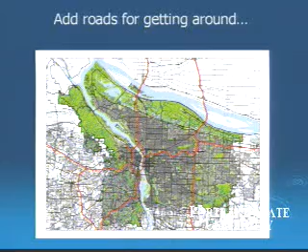Stormwater is when rain hits a surface. The magical transformation happens. When rain hits a surface, it suddenly becomes stormwater. And we have a lot of stormwater. Within the 145 square miles within the city limits, it equals about 40 square miles of buildings, pavements, and streets. So about 40 square miles of impervious surfaces that rain does not penetrate. Therefore, it runs somewhere else, making it stormwater. 37 inches of rainfall produce 80 to 100 billion gallons of stormwater per year in the City of Portland.

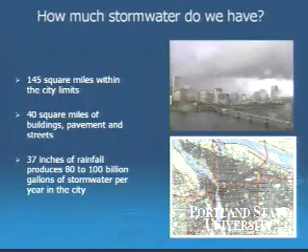For the past 8 months, there has been a transformation in my thinking. What I used to think was rainwater is just stormwater about to be birthed. We have to deal with up to 100 billion gallons of stormwater a year. It's an amazing task for us. Now, where does the stormwater flow? Before there was any building, any construction, any improvements, it ran naturally to the watersheds. There are 5 watersheds in the City of Portland. They all run to the Willamette River, except for the headwaters of Fanno Creek right here. They run to the Tualatin River. They're part of the Tualatin watershed.

But most people living in the City of Portland don't think of living in a watershed. And part of how we make progress on reclaiming and improving the Willamette River is, of course, reclaiming and improving the watersheds that feed the Willamette. So that's our task. And just to give you a sense of the shape that they're in, every single one of our watersheds in the City of Portland gets a failing grade from state government.

In the Willamette watershed, which you can see up there, which is a lot of the center of the city, we have problems with metals and toxics. It's the oldest part of the city. It's where the industry was founded back at the beginning of this city. In the Columbia Slough, which is along the northern part of the city closest to the Columbia, we have erosion issues and water quality. If you've been to the Columbia Slough, it was just used by industry as a dumping ground for almost a century.

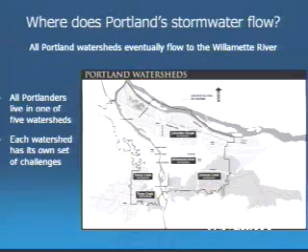Fanno Creek, which is on the southwest part of Portland, the biggest problem there is temperature and not enough water in the watershed. In Johnson Creek, on the other hand, we have a problem with too much water, and we're in the process of buying up the natural floodplain that people have built into. We've purchased about 130 acres of the floodplain, and we remove houses. We still have about 130 acres left to go.

And in Tryon Creek, we have issues of erosion, temperature, and water quality as well. So there are lots of problems in the world. Why should you care about stormwater? Why do you care where it flows exactly?

Well, just from residential use of property, we get herbicides, pesticides, fertilizers, detergent cleaners, animal waste, paint and household chemicals, motor fuels, oils, lubricants, solvents, and then as you get into the commercial use of property, you get into things like industrial toxins, heat, and erosion caused by excessive flow rate.

If the stormwater doesn't go into the ground to get cooled, if it just flows directly to the river, it hits the river or the watersheds or the streams too hot. Heat kills fish as much as pollution does.

I also want to point out that when it comes to stormwater runoff from streets, motor fuels, oils, lubricants, solvents, tire rubber, and brake shoe linings are not cleaned by the city's sewer system. There isn't anything that cleans these things out of the city's sewer system.

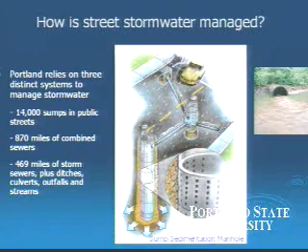But if you live in southwest Portland, even though you see a street that looks like any other street in the city, and even though you see the grate in the street, it goes directly to the river. Doesn't pass go, doesn't do anything, goes directly to the river. And when it hits the river, it can look a lot like this.

So just to give you a sense citywide of what is served by what, the magenta is the combined sewers. I think of it as pink, but somebody thinks of it as magenta. The dark red is the separated sanitary sewers.

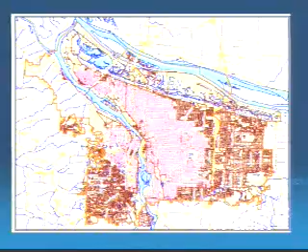So to be clear, this is the sanitary sewer system. We have separated and we have combined. The dark red is where the pipes in the ground only deal with sanitary sewer waste. The pink is where the sanitary and the stormwater are dealt with in the same pipes. That's the older part of the system in some cases. So that's sanitary. This is stormwater. We run two separate sewer systems here.

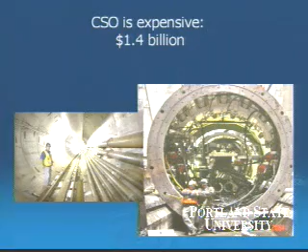So, many of you heard about the CSO project, and you might ask, we're going to spend $1.4 billion on the combined sewer overflow project. On the west side, the pipe is 16 feet wide. On the east side, we're soon going to be breaking ground on the other section of pipe that's 25 feet wide. Shouldn't that take care of this whole issue?

Well, it doesn't. Again, for a number of reasons. One, if you live in Southwest, again, it goes directly to the river. If you live on a street with a sump, the street stormwater runoff doesn't go to this pipe either.

We have some of the highest stormwater rates in the United States. We charge people separately for their sanitary charge, which is very high compared to other cities in the United States, to pay for that $1.4 billion CSO project. But we also have one of the highest stormwater rates in the country.

And the major reason for that is that in Portland, as opposed to most other cities, the sewer ratepayers pay for all the street stormwater charges. In other cities, automobile users pay for it with the gas tax. Here, the sewers pay for everything. In most other cities, it's paid for by gas tax.

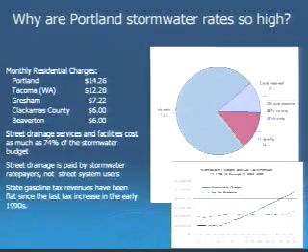Some other statistics there. So, we're trying to rethink stormwater. And we think that we can make stormwater into a positive. And you're going to see how we're trying to manifest and re-engage our community into turning stormwater into what it was before we were a built-out city, which is a positive for the environment.

But even if we didn't want to do that, there are many regulations that would make us do that. We have the Safe Drinking Water Act. We have the Clean Water Act. We have the Endangered Species Act. We have land use laws, and we have the Portland Harbor, which has been designated a Superfund site because of historical pollution. And there are many things that drive us to do this, even if we didn't want to do it.

This just gives you a few of the other regulations that you might not know about, but they'll be on the test later in the discussion, of the kinds of things that we have to react to in terms of trying to deal with both sanitary and stormwater sewage. So now we're getting into how to turn this into a positive, and we do look back on what happened before we were a built-out city.

The typical annual water budget in forested land cover, and we were forested and field land cover here: when the stormwater hits the ground, about 37% of it evaporates. Only 0.3% is surface runoff. And that's an important thing to key in on compared to the next slide. Then about 25% of it is within the first 5 feet from the surface, and then about 37% of it goes into the groundwater.

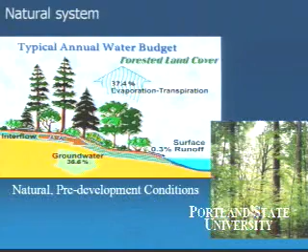But in a typical urbanized area, 25% of it does go up in evaporation. Surface runoff goes from 0.3 to 30%. Interflow, which is again 5 feet below the surface of the ground, is about 30%, and only 15% goes to groundwater. So we go from 0.3 to 30. Interflow goes up from 25 to 30. Groundwater goes from 36%, you lose about 10%, to about 15%.

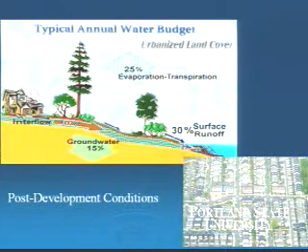Now, the problem with so much, up to 60%, being either surface runoff or interflow is, again, it hits the rivers, or it hits your streams or creeks hotter, more polluted, than if it went down into the groundwater and was both cooled and filtered. That first 20 feet of soil is what filters out most of the bad stuff, that's a very technical term, bad stuff in stormwater.

So, what's the best way to deal with stormwater, street stormwater? Manage it as close to the source as possible. Don't put it in a pipe if you can help it. And basically try, in an urban setting, to mimic the natural environment. If you have a house and you have downspouts, just let your downspouts go. Let them out into your yard, let them out into your garden.

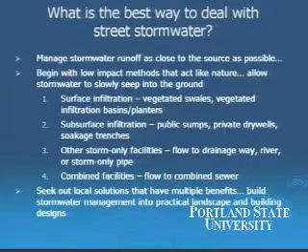Subsurface infiltration is what you saw earlier when the slide was up on the sumps. We get so much stormwater off just a block of street that we can't just let it meander around in people's yards because it would flood their basements or do other damage. So we had to do sumps, but sumps are a pale substitute for just letting it percolate down from the top. Sumps are a situation where you get so much volume, you've got to create some capacity for that sump to fill up when it gets really rainy, and then, when it stops raining, it deals with a large amount of water.

Other storm-only facilities flow to a drainage way, river, or storm-only pipe, like in southwest Portland, where the stormwater goes on the surface directly to the river. That's a third. And then the last and most expensive are combined facilities. When you mix stormwater with sanitary sewage, which is really warm, by the time it hits the Columbia River, it is far too hot. And again, it hasn't been fully filtered by the natural filtering that comes from letting it percolate down from the surface.

So we always look, when it comes to street stormwater, to get multiple benefits, even beyond these. So what we've been piloting in the city of Portland for the past 6 years has been the creation of green streets. And a green street is a street designed with landscape areas that capture, clean, and infiltrate stormwater. And infiltrate means let it percolate down to the groundwater.

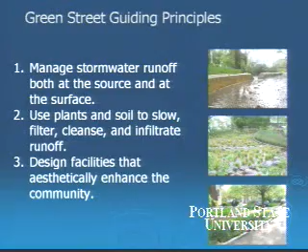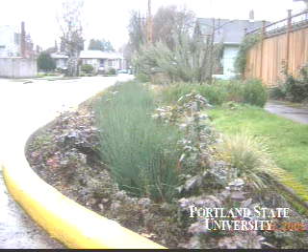People want them, as opposed to feeling like it's big government forcing yet another thing on a neighborhood. They actually want these things. This is an example of retrofit at a site along a street that has a couple of different benefits.

One, it addresses the city's goals for neighborhood livability, sustainable development. It adds green spaces, and in the city of Portland, if you live in East Portland, east of 82nd, it is an incredibly park-deficient part of town. We do really well in terms of providing parks and green spaces west of East 82nd, but east of 82nd, which we recently annexed, it is very park deficient, and with green streets we can provide at least some more green infrastructure in the area.

The other benefit of a green street is that it makes the civil engineered investments, with all due respect, last longer. The more we're growing as a community, and the less of the stormwater we put into the big pipe and into existing pipes as we grow, the longer those facilities will last. So instead of lasting 50 years, the big pipe can last 100 or 150 years if we can get that stormwater out of the system, because that big pipe will use up its capacity with growth in about 50 years, and then we'll be back to overflowing into the river. Stopping the stormwater from going into the big pipe will make it last longer.

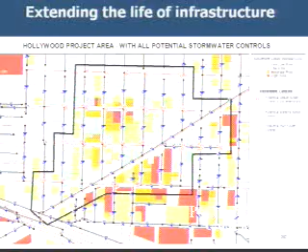And again, it meets federal requirements for pollution reduction and source management. It cools the water, and it saves money. So, in the Hollywood area, Hollywood has some deficient sewers. It was causing flooding in basements. It was causing unsafe streets. And it's an example of how the Bureau of Environmental Services, working with transportation, did a Green Street project that actually saved money.

So it was 20 blocks. The landscape flow reduction approach, which was the Green Street approach, cost about $3.5 million. We had to retrofit some streets with planters, rooftops, disconnecting pipes that go into the street or that just flow out into the street from driveways. And we did have to replace some pipes. But the conventional method, the standard method of just digging up all the pipes and replacing all the pipes, would have cost $1 million more.

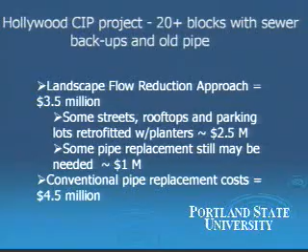Now, in the process of doing that, again, we go back to the multiple benefits. You have more water going into the groundwater. It wasn't on the slide, but between 20 and 30% of the water you see in the Willamette River and in Johnson Creek or Tryon Creek or elsewhere comes up from below, or it should. A healthy river has a significant amount of water that comes up from below. If you've got the stormwater going into the ground, it comes up from below.

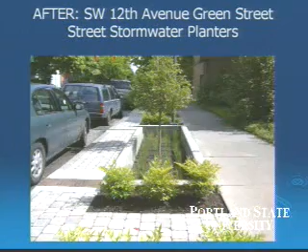This is another example of a Green Street on Southwest 12th, right nearby here. Unsightly, hard to get out of, not much going for it. And after. This was done in July 2005. It manages stormwater. It also filters pollutants. In addition to just the plants, it's designed in a way to filter pollution, and also provides more room for people to get out of their cars. So before and after.

This is just an overview of the design. The drainage comes from the south, flows into the first planter. This gets a lot of stormwater. It's designed to flow into the first planter, and on rainy days you'll see this really fill up, and once it overflows, it goes back out into the street, and by the time it gets down over here, only on the most rainy days would we have a small amount going into the piped system, the combined sewer overflow system. And all along the way, it gets filtered.

And this little pad of cement here is very important. It's just a flat surface that the street stormwater comes in off, and it filters a lot of the brake dust. It filters paint. Much like panning for gold, it filters out the heavy stuff. And then, through the Office of Transportation, we come along and sweep these on a regular basis. So even before it hits the plants, a simple pad of cement will filter out a lot of the nastiest stuff.

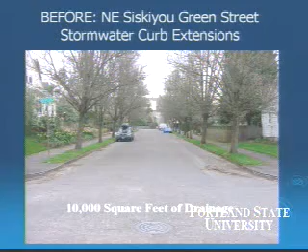This is another example. This is 10,000 square feet of drainage from the block you see in foreground to background. This is on Northeast Siskiyou Street, and this is after. Before. Of course, it helps that the before picture is in winter. But still, and after. This was very much supported, and now we get requests from neighborhoods all around town wanting to do the same thing.

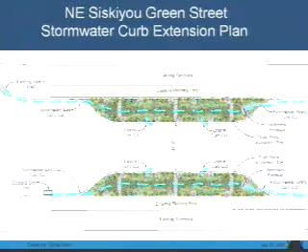This is a little different in that the water flows in directly. This is not a well-traveled street, so we didn't have to worry about filtering out some of the nastier brake linings and paint specks and things like that. It flows straight through, and any overflow goes here.

When you see this thing on a normal day, it looks incredibly oversized, and you wonder why it's so sunk down. You go on a day like any day in January, and it's pretty much filled up with water. We have calculated, and you'll see later, oh, there's an example.

We choose the plants very carefully. These are plants that are hardy. They can survive once they're started without watering in the summer, which is a problem with the Oregon climate, and they have proven qualities of filtering out some of the smaller toxins.

This is that Glencoe school site that I showed you earlier that was sort of circular. I think I have more pictures here. This was the design.

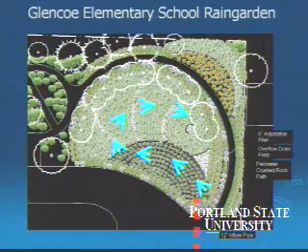Are there any landscape architects? Okay, this is going to be a growing field for you all.

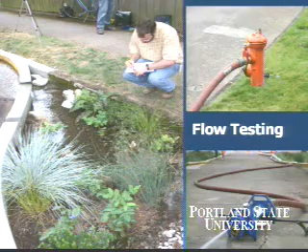The other thing you need to know is you cannot do these swales in every part of town. They're very difficult to accomplish in Southwest because Southwest has the wrong kind of soil. It's very important that we flow test because Southwest will slide off the hill if you do the wrong kind of Green Street treatment in the wrong kind of place.

But in much of the city, we have this great soil that once existed in southeastern Washington that came here as part of the Missoula floods, and it's very deep, and we're an ideal city to do this on. So the peak flow reduction, 81%. It takes about 16 minutes for the water to percolate down.

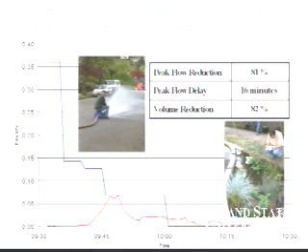And those of you that are civil engineers, I'm sure you can make sense of that chart behind the pictures, because I can't, but I'm sure it's very, very important. We've been at this about 6 years, as I mentioned. We'll continue. We've learned a lot. We're going to continue to monitor this, including performance over time.

As you expose soil to this kind of constant inundation with water, does it compact? Does it become less proficient? We're not seeing signs of that, but that's the kind of thing that we're going to want to continue to monitor. Aesthetics, maintainability, and durability.

Some of the early green treatments, a great example is if you've ever been to the Opera facility, they've sort of got one of the early green treatment parking lots. It's now full of blackberries. We've learned a lot in terms of how to battle blackberries and how to battle ivy so that they don't sort of take over.

And then groundwater quality: our goal is to get billions of gallons more into the groundwater that's been filtered through this process, and we'll be able to hopefully improve the habitat on the Willamette and in the 5 watersheds.

We are moving from the pilot effort to full implementation citywide on this. Council, at my request, recently passed a goal for the city of Portland that within the next 10 years stormwater on all streets would be dealt with on a Green Street basis. It doesn't save us money in the next few years. It doesn't save us money maybe even in our lifetimes.

Yes. You have to press the button.

Yeah. What's your take on the gas tax for paying for some of this? In terms of, is it possible that this would be implemented in the next few years in Portland? Using the gas tax for some of this is possible but problematic. What the gas tax can be used on is prescribed very narrowly. But there are some elements of this, pervious pavers, pervious pavement, is another way to do a green street. You can use gas tax for those.

The reasons why I don't favor pervious pavement on streets is that over time the pollution could make its way through the pervious pavements, and then you could be dealing with contamination under all the streets. I would rather deal with the contamination once it's been put in a swale than having to deal with it under all this pervious pavement. So it's difficult to use gas tax for swales. You can use it for sort of pervious paver treatments, but I don't think in the long term that that's the way to go, given that the federal and state regulatory agencies are on us all the time for auto-related pollution, especially mixed in with stormwater.

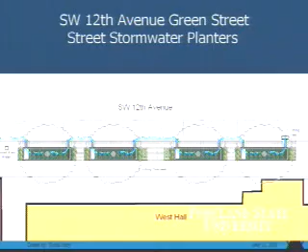But I think the work on 12th Avenue shows that we can do this in highly congested areas and not lose a single parking spot. That's our goal. The challenges of getting green streets done just financially, I don't need to add to those challenges by making it sort of a trade-off between retail or parking or anything else. We want to add to the environment, and we think we can do that in even the most urban areas.

Max. How does the project fit into the budget, and how is that expected to grow in the future? Well, the biggest challenge we have right now is not knowing what to do, but how to pay for it. Unfortunately, I had the dubious task of being appointed transportation commissioner and then having to cut 17% out of the transportation budget because Portland is not growing as fast as the rest of the state, and gas tax proceeds are allocated on a population proportional basis.

So what we're working on, though, is we're redoing streets all the time. And so if we make it part of the regular maintenance to the extent that we can, as we make it part of our work with developers like New Seasons on Division as they do their development, if we just make it a part of regular business of maintenance of the city, our hope is that we can move forward in the next 10 years towards that goal of all street stormwater dealt with on site. We're going to continue to look for more gas tax paying for these stormwater facilities, but the state legislature last raised the gas tax in like 1992. Thank you, Carl. And it's going to be a hard sell. Yeah.